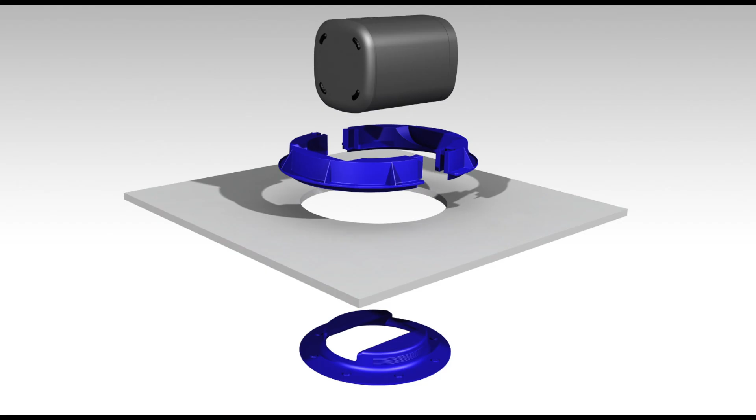Why make the speaker Cradle Sonos 1? How to install it, and 5 common questions.

The speaker market is huge and growing quickly. However, most products are aimed at function. Google, Amazon, and Apple just have a few audio-focused products.

But the brand with the most awards and the biggest reputation for premium smart speakers would be Sonos. Sonos have the Era 300 with spatial audio, the 5, soundbars, subwoofers and more.

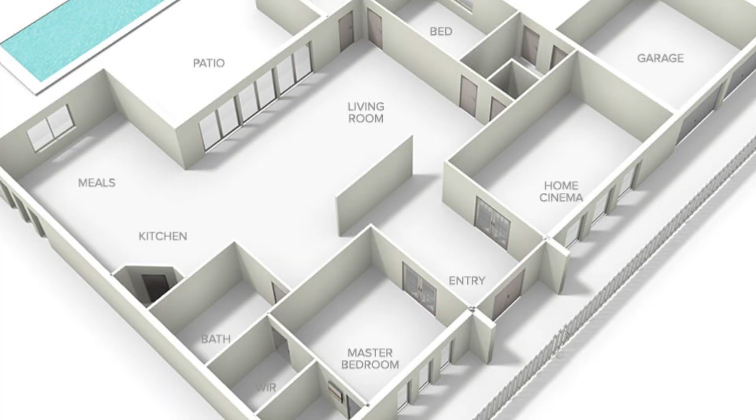But when we think of music around the house or in a commercial environment, the 1SL, Era 100, or the ceiling speaker kits are often used. The 1SL doesn't have a microphone for smart assistants, the SL meaning speechless.

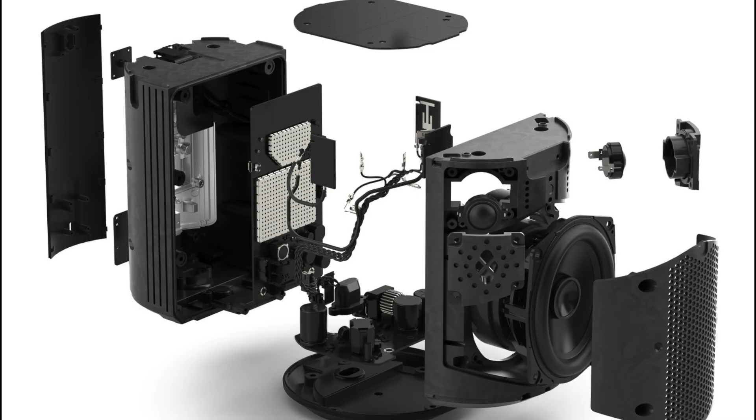So it's the cheapest option, but it has Trueplay tuning, so audio is auto-calibrated to suit the room. The Era 100 features 2 stereo speakers at the top and a mid-range.

Then you have the Sonos amp and in-ceiling speaker kit. Sonos and third-party manufacturers like Vogels offer wall mount and floor mount options.

As an architect or a builder, you'd want to hide speakers, or at least free up space, so table space or floor space. You also need power and ideally a physical data connection. You try to face audio in the direction of the audience, towards their heads.

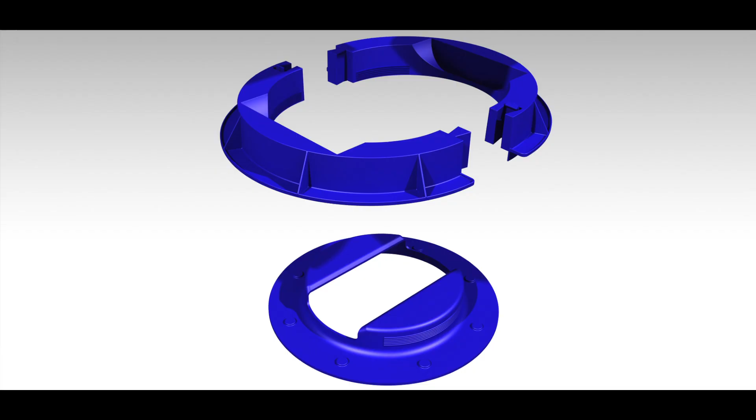Based on the above, wall mounting's a nice solution, and when there's a much larger budget, the ceiling speaker kit. The Indigo speaker cradle allows a 1 to be hidden.

Most ceiling cavities are easier in terms of cabling as you don't need power points. Because the 1SL is the cheapest speaker and the install is cheaper and faster, costs are minimized. There's also flexibility. Imagine a bathroom that requires just 1 speaker.

If you have a Sonos soundbar, you can use the 1SLs in the ceiling as a discrete rear channel. Install them under the eaves for outdoor entertaining.

For tradies, this is a cheap option, but also convenient. Just keep a couple of 1SLs and a couple of Indigo cradles in the van, and you'll cover most of your client's requirements. So that's why we made it, but how do you install it?

An electrician will locate the ideal position in the ceiling while also avoiding joists. Using the template, they'll cut a hole and connect the Sonos 1 to a power point, often called a surface socket. Ideally, they'll connect a network cable too.

The cradle can be separated into 2 parts, which allows it to pass through the hole in the ceiling. Slide both halves back together. I find it's easiest when you push one side up and then the other side down. Squeeze on the bezel. Work your way around until the bezel and the cradle feel like they're tightly attached.

Then reach through the hole and place the Sonos on the cradle, facing the correct direction. The square shape of the Sonos 1 means that it'll fit snugly in place.

And here's a view from below, so you can hold on to the speaker until the last little bit, where you've got to use your fingers to just jiggle it into place. The magnetic grille can then clip on the front.

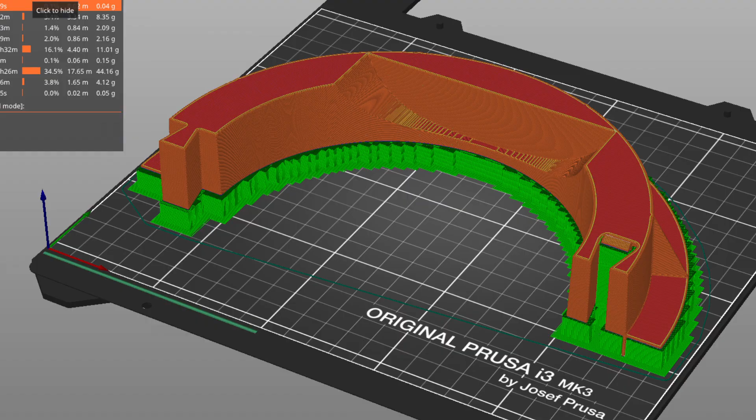And now on to the 5 common questions. It's specifically designed for just the Sonos 1, a perfect fit. It won't work with any other speaker.

We hope to release a speaker cradle for the Sonos Era 100 soon. The Sonos is held in place by gravity alone. Because of the shape of the Sonos 1 being square, rectangular, it stays in place without the need for redundant parts like cables or fasteners.

The second question, could the Sonos fall through the ceiling? Well, the cradle's about half an inch wider than the hole, so 1.5 centimeters. As long as it's installed properly, this shouldn't be an issue.

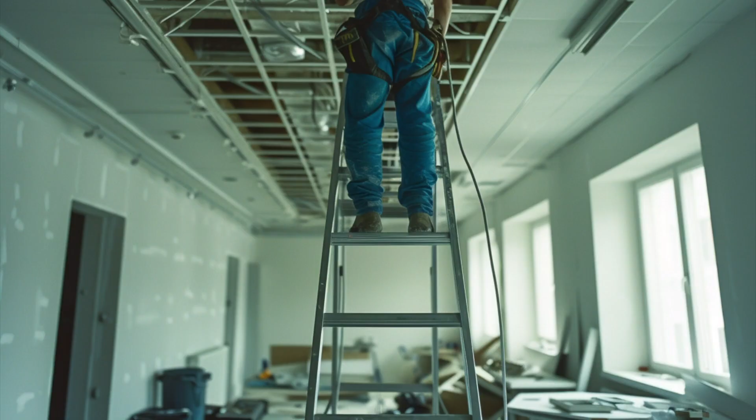Third, will my hands fit through the front hole? Well, the front is about 3 inches by 5.5 inches, which is in centimeters, 7.5 centimeters by 14 centimeters, so it should be fine. And the fourth question, do I need to connect it to power and data?

So the Sonos 1 doesn't have a battery, so yes, it needs a power point. The data is optional, but most industry professionals will prefer a cabled connection where possible.

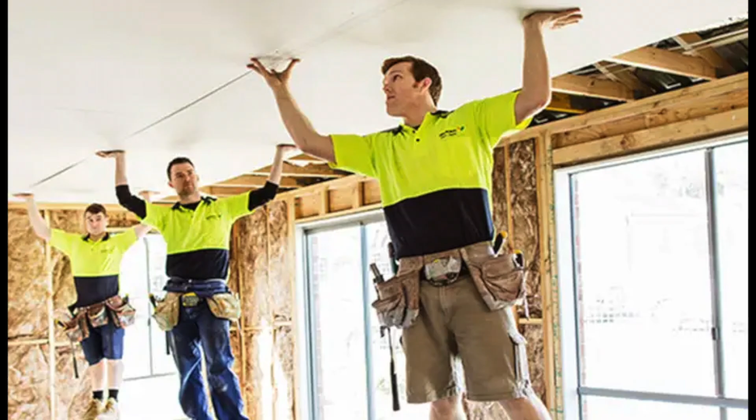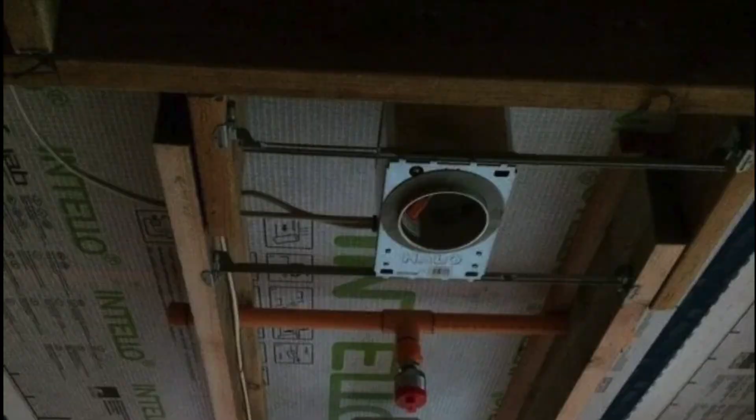Does it suit all ceiling types? The design features teeth as it allows for various thicknesses of plaster. The ceiling needs to also have space above it, but generally speaking, ceilings have a lot more space behind them compared to, say, the space behind a wall. So yes, it should suit most ceilings.

So let's summarize with the 7 reasons to use a ceiling cradle. First, more applications from houses to businesses to cafes. You don't lose real estate, like if you have a Sonos on a shelf. Ceiling cradles are cheaper than wall mounting or using passive speakers and amplifiers.

It's easier to work in ceilings compared to wall mounting and installing power points and possibly data points. Ceiling cradles are the fastest way of installing ceiling speakers. Tradies only need to keep 1 product in their van. And finally, it works with any room from a tiny bathroom to commercial venues and even outside under eaves.